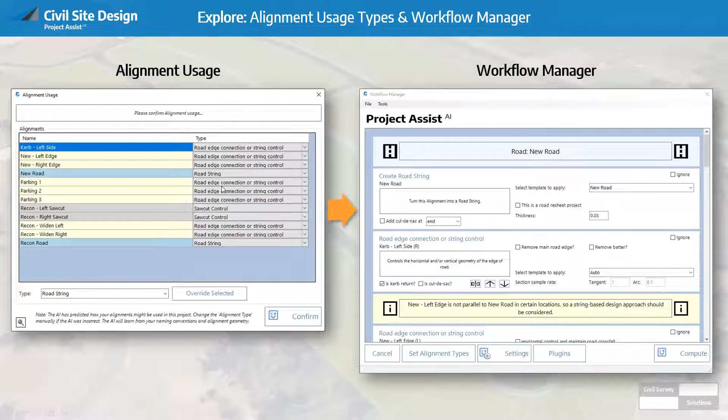Yeah, that's good. And when it comes to everything we're talking about, including working on existing or new projects, this morning we published a playlist of quite a number of videos on our YouTube channel which unpack in depth all of what we're going to be doing today. The second project I'll be working on has some road widening options and resheet options. There are 3 videos in this playlist associated to road widening on that particular project. This is a screenshot, so I can't scroll through it. So particularly with things like the alignment usage types we just saw, we can't go through all of them in one web session. So the idea is that they've all been unpacked in a little mini 6-part series for you, building up a project from scratch, which I'll make reference to at the end.

So the first project I'll be doing will actually start entirely from scratch. There'll be nothing on there other than alignments and templates. And this is the key to using Project Assist: it uses alignments and templates that you've created. So in the first instance, I'll be getting Project Assist to help me develop and build this road from literally the alignments. There'll be a center line for both of these 2 roads, and there are custom curb returns and also custom widening out to alignments on all of the roads, which we'll see in context very shortly.

Once we've done that, first of all, we'll be importing alignments to represent these islands and getting Project Assist to build them into the model for us using Model Builder, whereas we would normally do this manually. In fact, some of you may remember that a few years back I did a webinar where I actually used Model Builder on this job.

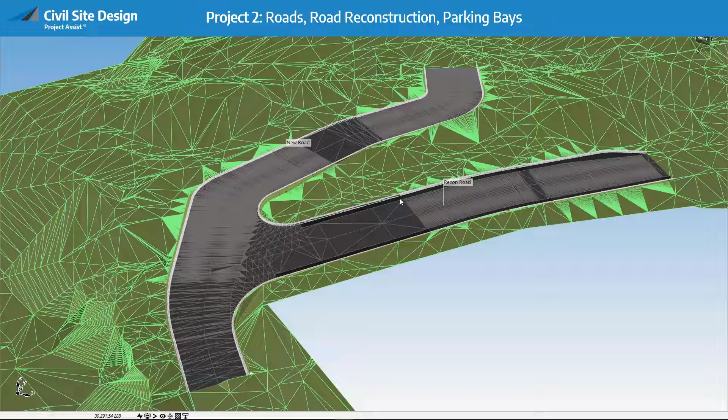Project Assist will do all of that for us, which is going to be extremely exciting to see. Secondly, we'll be then looking at a reconstruction road, building up in 3 phases, putting in a new road with some custom widening. Following that, we'll be then connecting in another road to that, which actually has some widening and some saw cuts. And then following that, we'll then get Project Assist to put in the parking bays for us. And you can see there a lot has happened in respect of trimming and maintaining elevations and connectivity, etc., all of which Project Assist will do, and we will show you.

Following that, Andrew, I'll just hand over to you. I've got these 3 slides for the rural road. Yes, so towards the end of the session, I'm going to explain the idea of plugins with Project Assist, and we've created a plugin called Australian Rural Road. I actually have a background at council, working for a regional council, so I used to do a lot of rural roads, and so in my example, I'll be showing you this plugin which will automate super elevation, sight distance, line marking, table drains, all of that type of stuff.

So it shouldn't go too long, but the idea of plugins with Project Assist is pretty exciting for us as well. Yeah. For those of you that missed it, there's an example of something you may see in Civil Site Design today, which we are using, well, at least I'm using a beta. Yeah, I'm the same. So we'll be able to show some new exciting stuff coming as well. Yeah, get a sneaky preview of some of the extra bits and pieces.

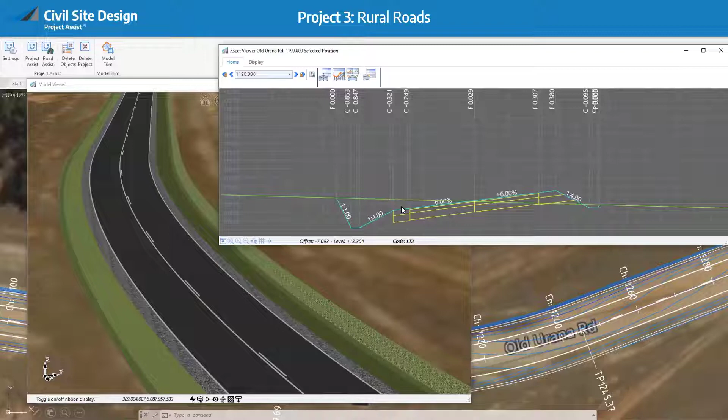Just following on from a question that we had earlier, the Autodesk platform version and BricsCAD version that this will work on, Andrew, would it be 2016? That's right. Yes. Onwards, and then BricsCAD V21. V21. Yes. Okay. So anything pre 2016, unfortunately, we won't be able to use.

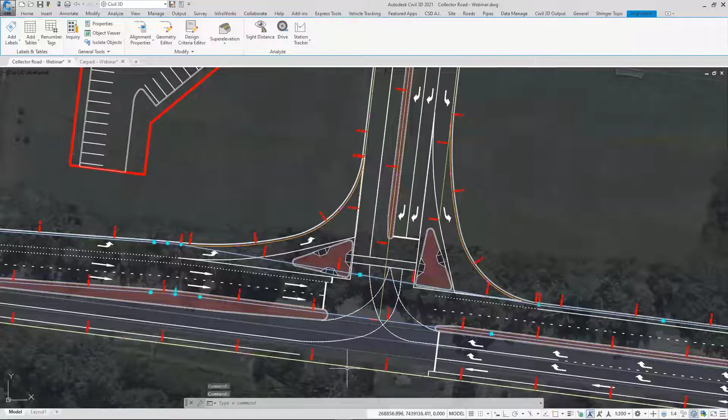Okay, all of the projects you're going to see today are real projects. This is a customer project provided to us from Queensland. So as far as setup goes, I have alignments that have been created by myself to delineate not only the crown, but also the left edges and right edges for all of the different roads. And then you can see here, we've got an alignment to delineate the outside edge. You'll notice that you can actually see the islands and the alignments for the roundabouts, but they're not going to be in play. So really all we're doing is focusing on the roads that we've got in play. I said two, I meant three, and the custom curb returns that are added in here.

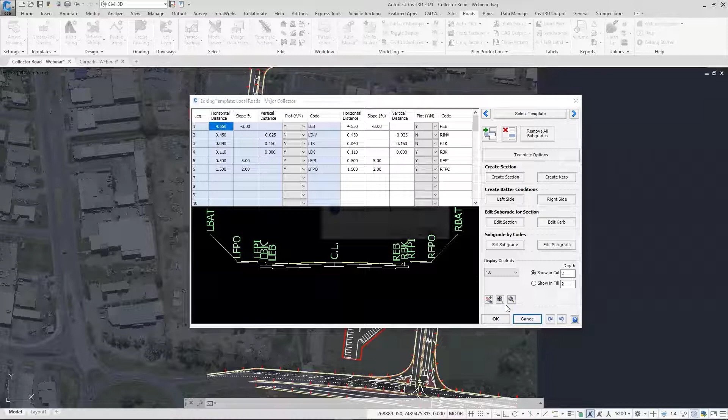So as far as the software is concerned, we haven't done anything with this job. We have drawn the alignments. We've got one template, which is this template here, that we're going to be using for the roads. The curb returns are going to be using auto, as you'll see in a second. So as far as setup goes, it's all relatively straightforward. As a manual process, I'd be looking to maybe use auto curb returns, auto road creation, then manually creating the curb returns myself, and then applying design variations to widen the EB codes onto these alignments.

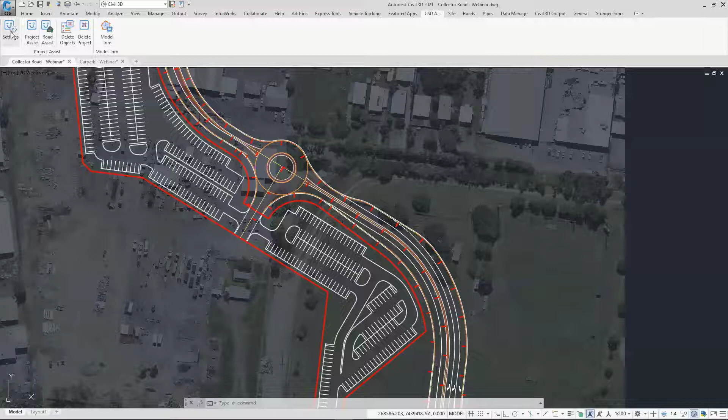I've just had a question come in about how do we access Project Assist. On V22, you'll see this ribbon tab up here. So on V22 onwards, you will see CSD AI, which conveniently is where I'm going to be going now. Before we start, I'm just going to unpack a little bit of the settings. We have a video that is dedicated to the settings on YouTube. It's an 8-minute video, but it unpacks all of this in context to how it works with Project Assist. I don't just simply talk through the form. I show you in context how it works with what you're actually going to be producing later.

But just a few things for you. First of all, what the software will do is it will look to assign these templates that you can see here to different aspects of your design. And these are from your data folder. So in a second, Project Assist will fire up and it will go, hey, you've got an urban road here. This is the template I expect that you'll probably want to put on there. Okay.

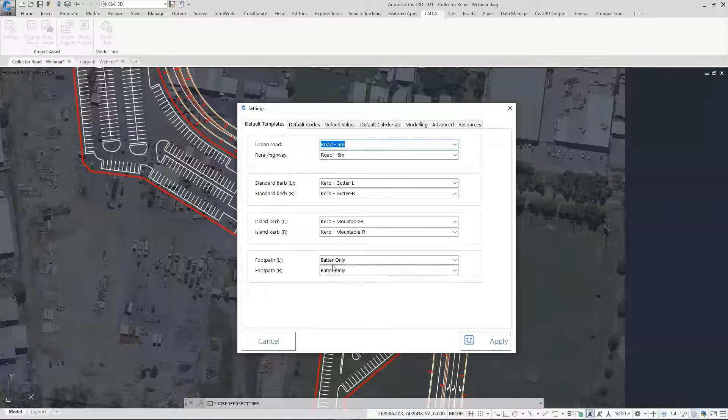Now, in my example, I'm going to change it in a minute, but I'll be using this one instead. So for each job, this is unique, but this just allows you to come in and predefine roughly the templates that you'd be looking to use. The default codes are what Project Assist will look for and then look to manage for you later on.

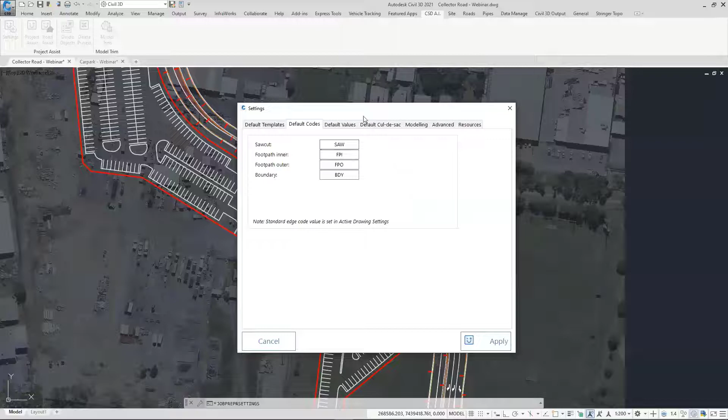So for example, I might be using a template where I've got a saw cut, and when the software sees the SAW code, the saw cut being applied, it will determine a number of different things it could do with that particular code. If you don't use saw cut, for example, on a job and you use SW, then go ahead and change that. But these are the default codes it looks for to manage within the job.

There are some other tabs in here, but due to time, I'm not going to go into too much depth with them, only because we are really very limited. And the video that we've created for this unpacks this in great detail to show you exactly what this does. Andrew, have you got any comments on that, or anything specific you might want to mention from this?

No, I reckon jump in. The only thing I'd say is that video you've got on YouTube that you posted today on the settings is brilliant. It's about 9 minutes and it covers everything in great detail. Great. Yeah, great. Thank you.

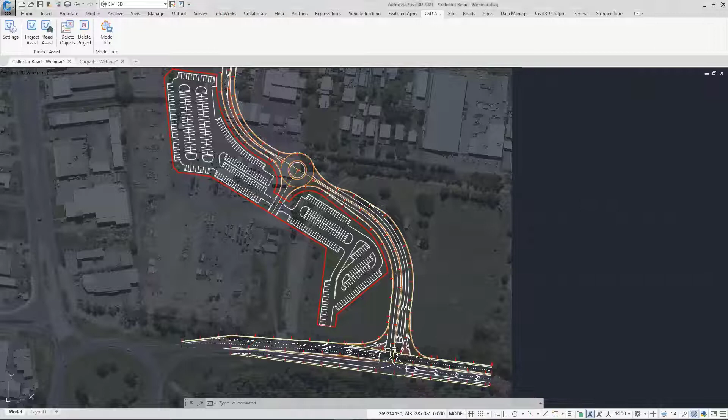Right, let's get started. So I've got alignments, I've got templates. That's literally all I've got to start with. So I'm going to go Project Assist. Now, this is called the alignment usage form. And again, there's a 6-part video series which explains what this does and then unpacks all of these different types.

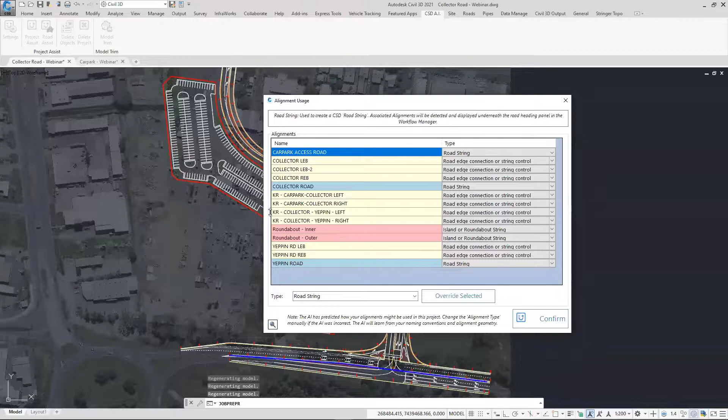Now, to make life very simple, for the start of this job we're going to focus on the 2 types for all of these alignments. We're going to ignore the roundabout for the time being, but the reason why I've left that in there will become clear in a second. So it has a look at all of your alignments in your project, and then depending on the naming convention, it determines what type should be applied. And as you just saw there, I can actually just go and pick a different type and override it.

Car park access road, which you can see is being highlighted in the drawing, collector road, which is highlighted in the drawing, and Yeppin road, yes, they're going to become road strings. The alignments that are being used to control the left edges of bitumen and right edges of bitumen on all of them are always going to be set up as road edge connection or string control. You'll find that road edge connection and string control does a multitude of different types, okay? But this is the one we're going to be picking.

So for the LEB, the REB, the highlight on this is really helpful as well, so I can actually see where the alignments are. Cul-de-sacs and curb returns are always going to be assigned as road edge connections and string controls. The only difference with the roundabout inner and outer is that we're going to assign a different type, and I'm going to cover those when I look at adding the islands later. Let's click confirm.

Now, this is basically the first time this is run. So the software's gone in and had a look at the different types that I've set up and then determined how everything should be associated. So this is what the workflow manager can do. So car park access road, this is the road over here. It's saying that it's going to turn it into a road and apply a template. All of them are going to have the same template. So as you can see here, I'm overriding that.

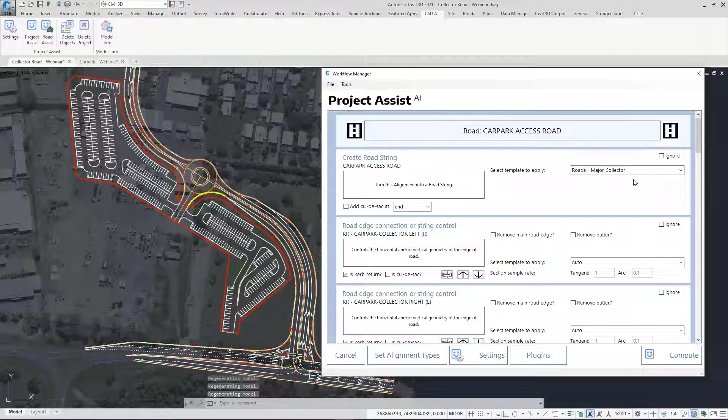Further down, we've then got the collector road itself. And obviously the template that we're picking there needs to be roads major collector. We'll be unpacking some of the discussions on thicknesses and resheets in the next job. The LEB and LEB2 alignments, which are basically following along this left side here, the software said, hey, so what would you like to do with these?

I can either take the LEB, maintain the crossfall that it is at the moment, so let's say it's -3%, and position it onto an alignment. So it's basically using the match to alignment variation. The second says, hey, what I can do for you is create a string, a profile string on top of that alignment, and you can go in and have the code positioned on that string and control the horizontal and vertical elevation of that particular code. Lastly, you can then actually have the software create a completely independent string. Okay, so it won't be attached with a variation to the design.

We're going to just simply use horizontal control and maintain road crossfall, which is pretty much match to alignment. We're going to do that for the LEB1, LEB2, and further down, you'll notice that it's saying it's creating a separate string. The reason for this, the majority of the time why it's automatically gone for create separate string, is because if the geometry of the alignment that you are using, in this case for the right edge of bitumen, varies quite considerably, the software would determine, if you're using cross-section design, that probably using a variation and positioning the code onto the alignment may not work. Okay, so it by default then goes, well, actually, I'd probably recommend a separate string.

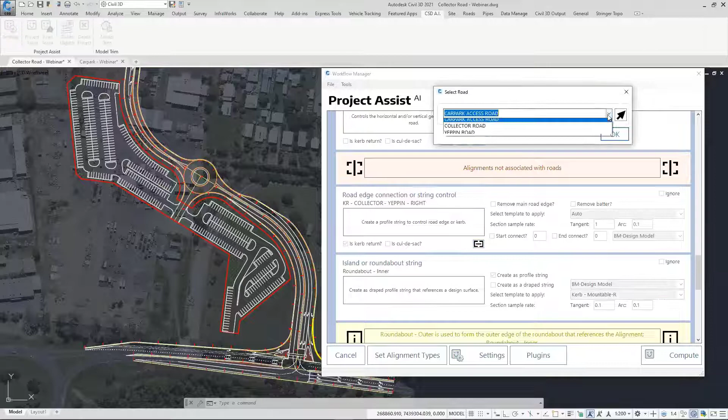The collector road curb return, as you'll notice here on the Yeppin curb return, is not associated to the road. So we need to make sure that it's associated to the collector road, always the side road. And the same goes lastly with the other alignment here, which is collector road. Now you'll notice that there is one remaining alignment in the job, which is called roundabout inner.

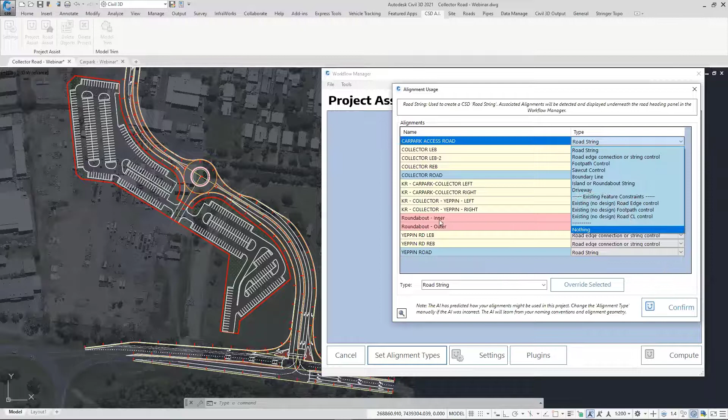In fact, what I might do is just show you now, set alignment types. When you come in here into the alignment usage types and click on the pull down, you'll see nothing. When you say nothing, what you're doing is you're teaching the AI that if it sees that alignment naming type or that alignment name, and this could be an alignment that you've created maybe to cut cross sections through your job, or maybe it's for a pipeline, so it's not really ever going to be used, you'd probably pick nothing. But if, for example, this will be used later on, I don't pick nothing because that's telling the AI never to use it again.

What I do, I'm just going to close this down, is I come in and tell it to ignore. So I'm going to ignore this, so it won't become part of this build. It's just not going to add it in at all. Okay, that means that Project Assist will try and use it the next time that we run it.

Let's now just scroll a little bit further down. If there were no curb returns or custom curb returns created, I could ask the software to apply 10-meter radius values for any that didn't have something there already. Other than that, we'll talk about the plugins later when Andrew comes to rural roads. I just simply click compute.

When you run this, have a look at the settings video, but there's an option which says, when I've done this, run it or create a thread, and it will create a thread which basically will recalculate everything for you if something changes. So we're going to click on build here. This is real time. This is not me doing anything other than just letting the software build, construct variations, curb returns, and put everything together. Whilst it's building, in fact, that's done.

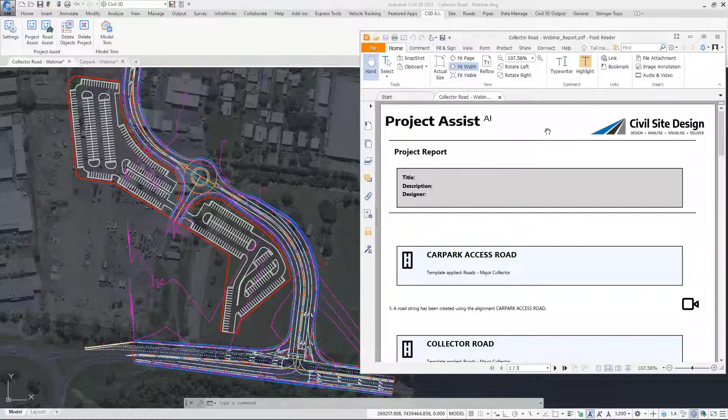Okay, so I'm just going to bring this in. When Project Assist has completed a build, it will generate for you a PDF report of every single step that it has done. So what you're seeing here is all of the work that you as a user would be doing if you were to create this yourself.

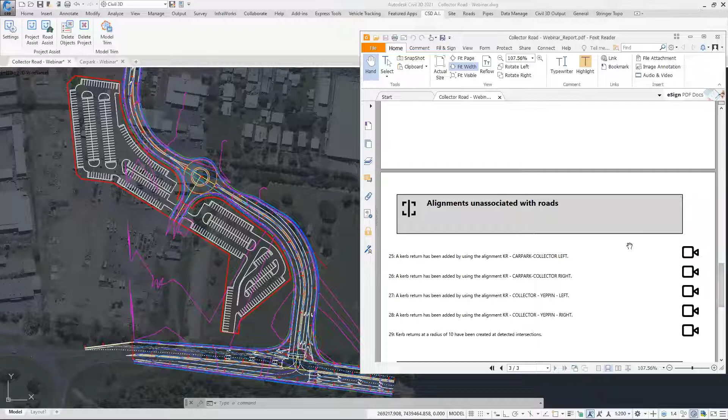One of the best things about this is it adds in extra sections for detail. So when you're creating roads initially, you're thinking, well, okay, I'll just set this to 10 meters or 15 meters. And then you have to go in afterwards and start adding extra sections, whereas this does this for you. So you can see here from the 29 steps that have just taken place in a matter of about 20 seconds, it's now built this for me.

Really, really recommend, when you run this for the first time or second time, look through what it's done. It's really important because you want to make sure that you've set it up correctly. You want to make sure that the correct variation, for example, has been applied over the correct chainage range, etc. This is building this for you, but we need to obviously make sure you always have a run through to check it. Let's just see what it's done.

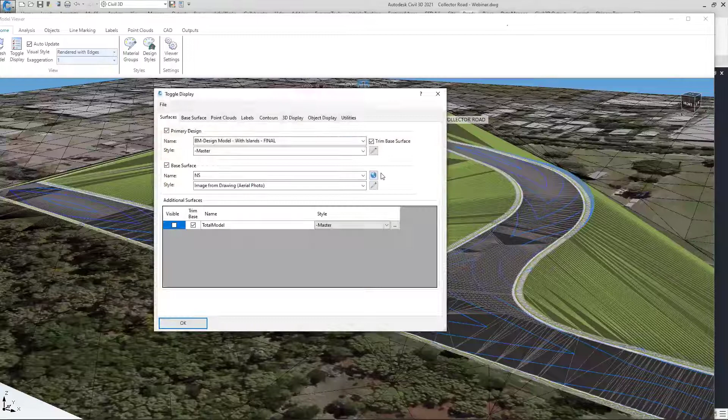What we'll do first of all is just go to the Roads tab, Model Viewer. Time is racing away, so I'm going to have to get through this quickly. Just bring Model View over to one side. And we'll go, I'm not sure why the built model got created, but anyway, that's something inherent from this job. We're just going to go okay.

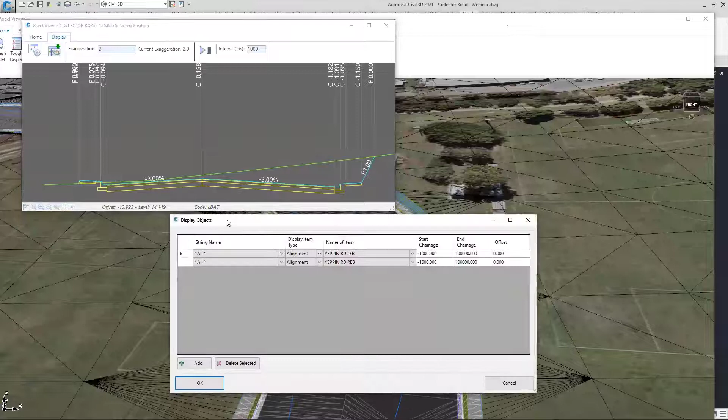So if we'd started this job from scratch correctly, you would be seeing this. Okay, so this is what Project Assist has just built for us. Got the roads, got the intersections, got the widening. If I right click, display a cross section, we can see here by going to the display tab, and let's just pop in some alignments for Yeppin LEB and Yeppin REB. You can see it's matched up the codes onto those alignments.

And if we go open section data, it's taken the LEB, matched it onto the alignment, and taken the REB, matched it onto the alignment. And it's done that for all of them. So as far as just quickly generating content goes and building your road from scratch, that's obviously the first part. The second part is, well, what if I want to add islands?

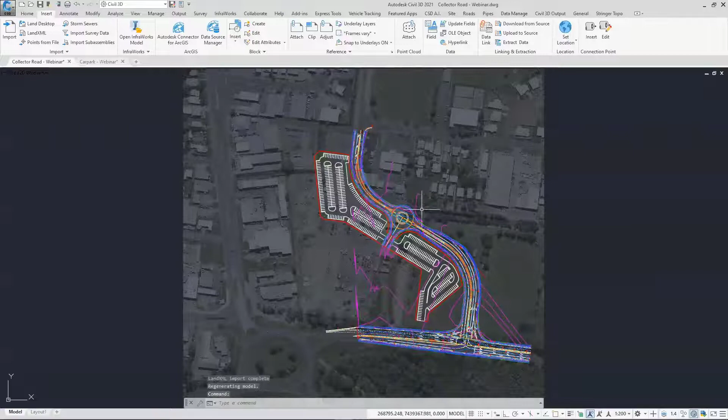Okay, now the islands are quite extensive, as you can see here. Well, in fact, what we'll do is, first of all, we'll bring them in as an XML. So rather than having them in the job initially, what I've done is created them as an XML file. And the reason for that, when we looked at the alignment usage form, it would have been quite overwhelming for you guys to see a lot more alignments. So we've basically done this in two parts to kind of reduce the impact.

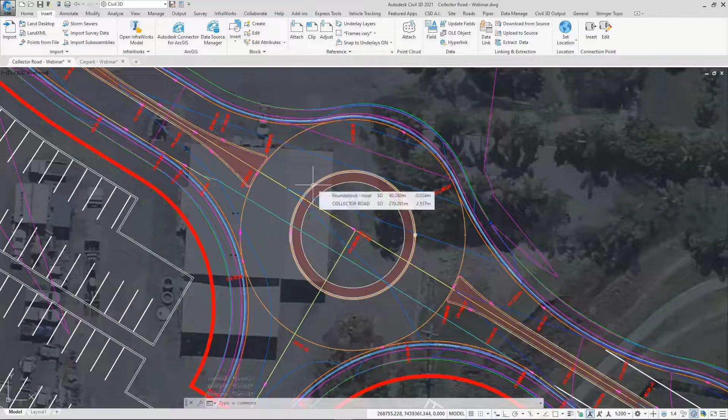So we've got alignments here for our islands. As you can see here, we've got 6 of them down here. And we've also got, which I'd already had in the job, which is a great way of being able to show you how ignore works, a couple of alignments for the roundabout. So the intention is that these islands will simply become draped profile strings draped onto a surface, and then the roundabout will also need to be draped.

Now, let's run it, but there's going to be a small caveat with this. Just saying simply drape onto total model won't work. So what we're going to do is we're going to go Project Assist. You can see the roundabout, outer and inner are still there. They're all being chosen as island and roundabout strings. Okay, the software will know if it's a roundabout as opposed to an island, but they're all getting the same tag. We're going to click on confirm.

Even, and this is my bit with this, even if you use Project Assist just to do islands on projects, it's still a huge time saver as opposed to doing this all via Model Builder. Now, they're not associated to roads, okay, because they're going to be draped onto a surface.

When you create a draped profile string, you always determine that there's a surface that it's connected to. So the surface that it will be connected to is this one here, BM design model. Now, the software is going to go ahead and use Model Builder and create a model which combines all of the strings that are already in the job, including Total Model. It's then going to take that model and allow us to drape straight onto it.

Once it has draped the islands onto that surface, we've obviously got a model with islands placed on top of it. Well, if I want to see all of that combined, the software will actually go ahead, and this is where I'm just going to flick ahead here down to the bottom. It will create another model which combines the design with the design of the islands. You'll see this happen in a second.

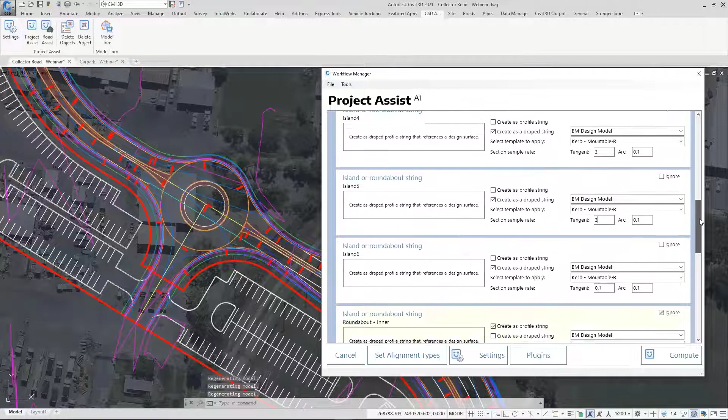So you can see it's applied a template. Again, we could go in and override the template. It's even determined the direction, which we'll mention in a second. And we'll come further down, and then we'll say, hey, don't ignore the roundabout. You'll notice the outer is not there. And again, this is because the outer is being used to form the edge. So we don't need to add it to the calculation. The software is going to do this for us.

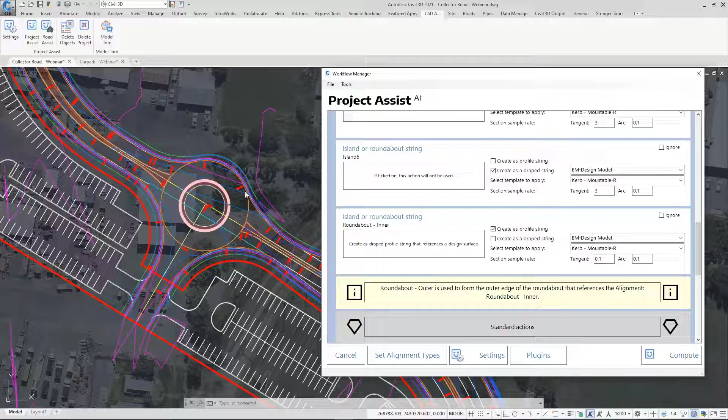Now, this will take a little bit longer. As Andrew's already pointed out, the sampling can be increased. To be honest with you, when I've run this with the sampling being around 0.1, it takes about a minute. And you may be thinking, well, a minute to create that many drape strings, maybe you are thinking that's incredibly quick.

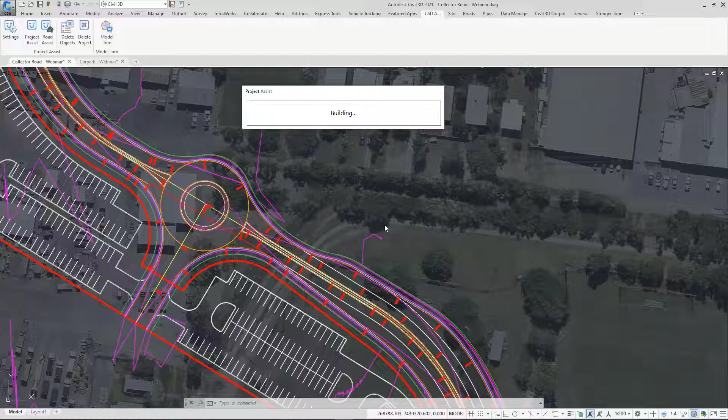What it's also doing here, whilst it's draping the strings all onto that surface and creating them, adding the template, is it's also using Model Builder to cut all of the centerline and dumb codes out of the model where they overlap on top of these particular strings. So in a minute, what you're going to see is the centerline no longer within this particular model being created or drawn underneath these islands. So this is the part where using Project Assist and Model Builder comes into its own. So that's perfectly timed.

And as you can see here, we've ended up with approximately 51 steps being taken. So I might just close that down. Let's have a look at what's happened here with the model. I'm actually going to jump straight into Model Viewer. This gives us the best context, particularly when it comes to looking at drape strings, to see what's happened.

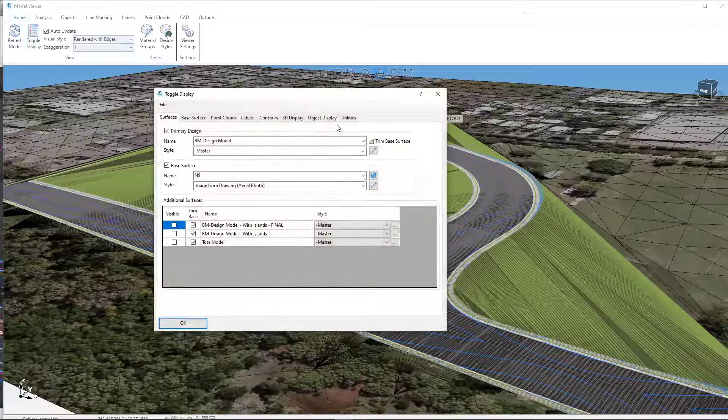So here's Total Model. We'll go Toggle Display, and we'll ask it to simply just show the built model here, BM design model. So the software went ahead, created a built model, and just said, hey, include Total Model. That's all it's done. Then, once it's done that, it's then used that to drape on the islands, which is this model here. I'm going to click OK. And this is the work that it's done.

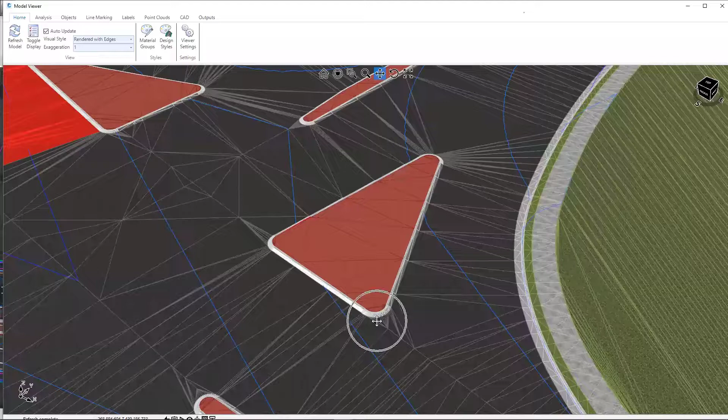So for a start, I think this is one of the nasty little islands that I've had to use Model Builder. Project Assist has used Model Builder to trim the dumb codes from the curb return and the edge codes from the road to complete that all the way through. And we'll come back to what's going on here in a second, including the roundabout. Okay, so the roundabout has been draped around the edge onto that particular surface.

And then if we right click over here and open the vertical grading, the inner string has been created. So the inner string, this isn't a template that's coming across here. This is pure modeling that we're seeing here. The inner string, which is called inner here, if we look at auto profile, all of these constraint values have come from the settings, by the way. So have a look at the settings video.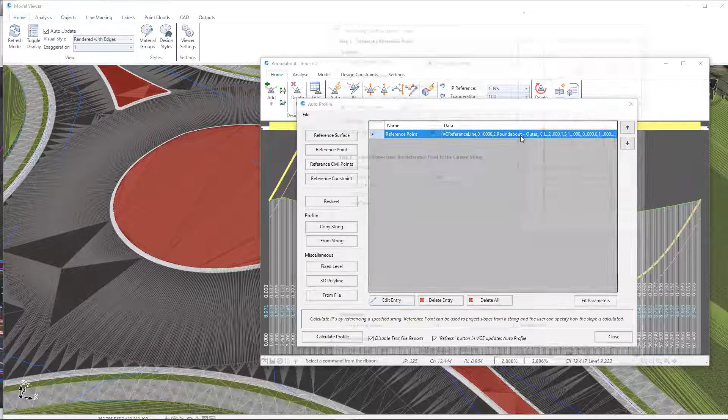Auto profile, I'm going to double click, and you can see here the roundabout outer, using this reference point entry. I made a big song and dance about using reference point in the string techniques webinar a few weeks back, so have a look at that to unpack reference point in a bit more detail. But you can see here the elevations of the inner are being set 3% above the center line of the outer, which is this here. So if I wanted to change that, I could go in and change those values.

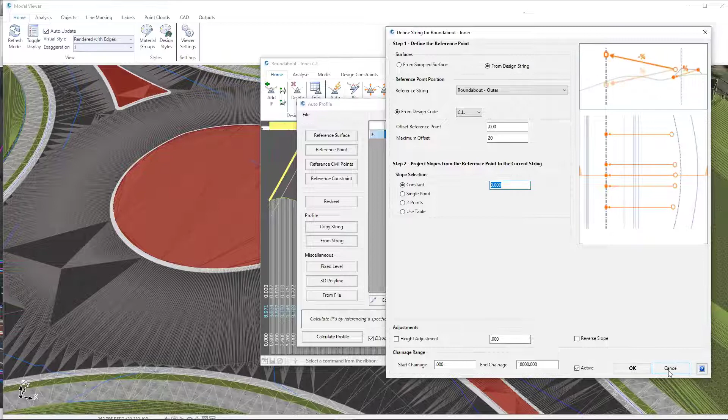So we're building you a project which you can now go in and start to work with and manage. The hard work of Model Builder has just been done for you. So the center line of these two roads across this intersection have been cut out. And as you can see here, we've got this really nice smooth transition into the roundabout.

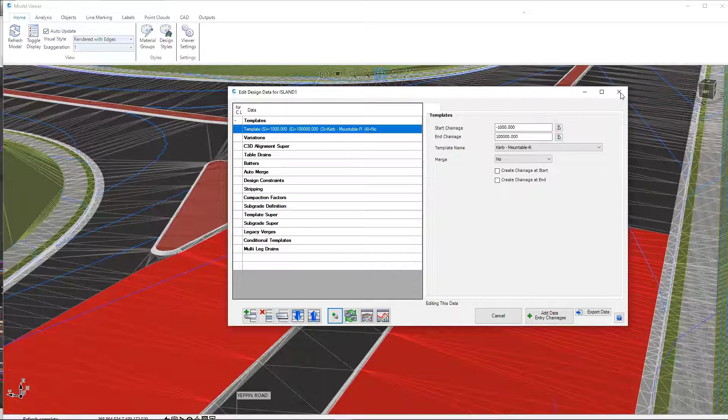One thing that you may not get perfect every single time is, you can see here, the template that was applied was actually the wrong way around. So instead of Kerb Mountable-L, that should have been right. So we're just going to go templates, change that, Kerb Mountable-R, not the other way around, auto model, and we're just going to close this down once it's finished. So that auto model is now updating all of the models in the background.

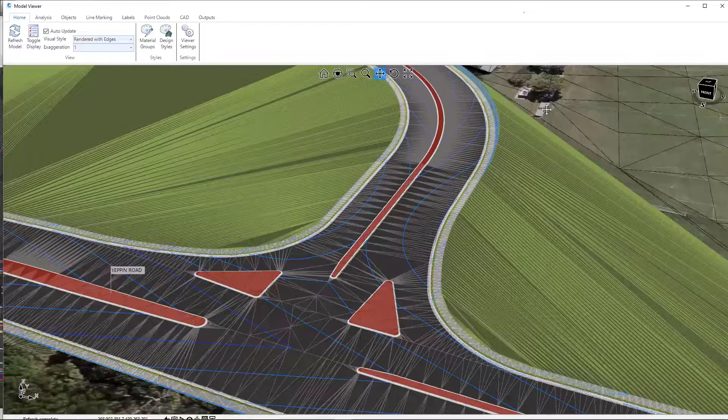So that's the first example. Took a little bit longer than I intended, but we've unpacked a little bit more on this. So you can see how in a matter of minutes, I'm able to build this and start designing. Okay, so the hard work has been done for me with Model Builder. I can start to work with this, knowing that in the background, I've also got threads.

If I go thread editor, islands, here we go. So I've got roads only. This is an entire thread to update my design if something changes. And I've got another one here called islands. So I can just compute the thread to rerun it if something changes, which is extremely handy. So that's the first job we wanted to cover.

Andrew, have we got any questions just while I'm flicking over to the next project? Okay, let me just jump in. We had one: can you manually change the string for the crossfall if there are constraints? So yes, you can. What Project Assist is doing is creating the strings for you. It's setting up the design constraints, and it's setting up auto profile entries like the reference point that

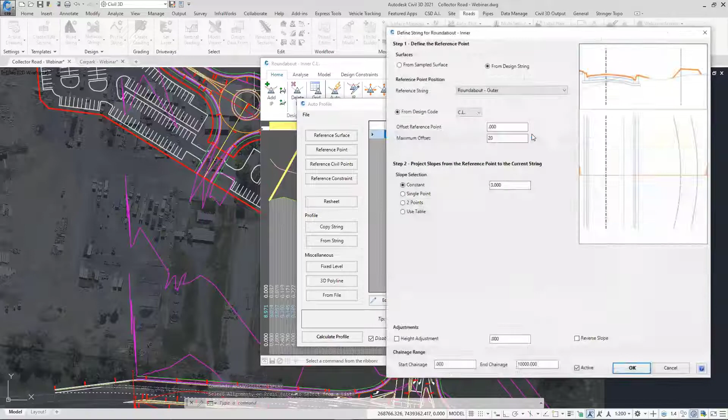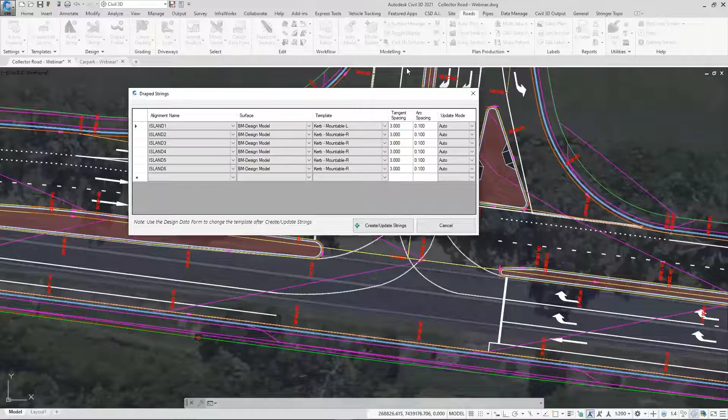Jonathan showed. The beauty is everything that's done could have been done manually by you. This is a great thing about this type of automation. There's no black box stuff. So if you want to delete entries, override stuff, change stuff, you can. Traditional automation can be a bit constraining. A good example is the curb return command, where you have to follow certain rules and parameters in order to get it to work. But this is building the project up the same way a user would.

Yeah, and in fact, that reminds me about the next part of this: if you want to remove something from the model, again, the way the user would. I'm just going to take out one of the islands. Now, normally you'd probably go up to the roads tab and go delete string, and by doing so, you then leave an entry in Model Builder for that string. There could be other consequences because you've then got to tidy up and remove other bits and pieces from your

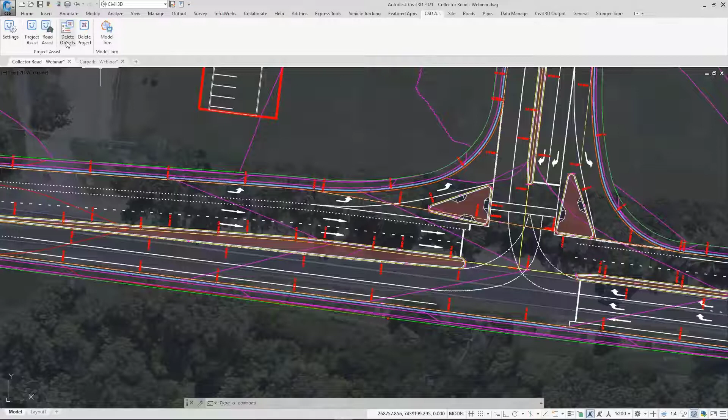design. Civil Site Design in the AI tab now has a delete objects option, which, to be fair, you can use just as an independent delete option. And the great thing about this is it does everything. It removes all of the variations, references, Model Builder entries along with that string. So if I go to island 1 here and just remove references, the impact of doing that would be fairly significant.

Okay, I've got to remove a drape string entry, etc. Let's just go delete selected. Yes, and it may take it a few seconds to wipe it out. But the idea is that this tool, and there are other tabs in here you can actually use to delete, is a great way of removing content, but also removing content when it's been added to models, which is one of the big things.

So you can see there, we'll actually get a notification in a second saying it's complete, which it's done, and click close, and that model has now been updated without the island included.

Following on from that, I just wanted to show you one other tool which was next to delete objects, which was delete project. So this is a project that we've sort of semi-started. I've decided, you know what, I want to start from scratch, delete project. Yes, this won't delete your alignments. This will only delete your strings and models. Go, and now I've started from scratch. So the intention was just to show you how those two tools work.

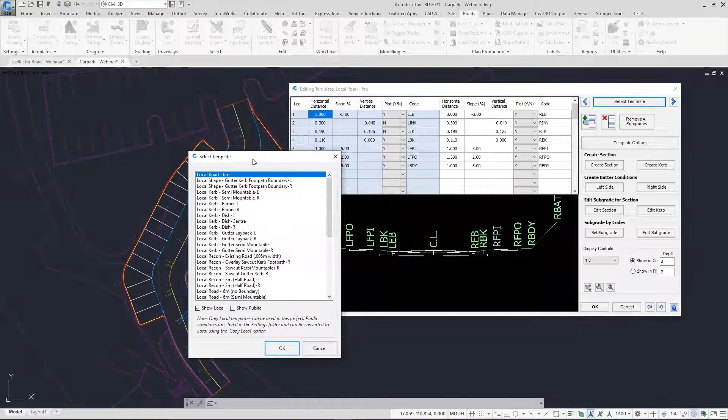So again, this job has had a little bit of work done to it. We've got alignments for the left edges and right edges of both roads. We've actually got one for a saw cut here on this particular road. And then we've also got alignments to delineate the parking bays. We've got a couple of templates, and they are as follows. There's quite a few in this particular job, as you can see.

We've got new road, which is the road going in here, a straightforward road with a one-way crossfall. And then in addition, we have reconstruction road, which is slightly different, but it's got some saw cuts positioned in it, which will be quite an interesting one to show you for this road. So what we're going to do first of all is build new road on its own and have the left edge and the right edges managed with those alignments. So very, very similar to the job we just did.

I'm going to go project assist. You can see here that all the alignments are offered to us, including the parking bays. Okay, so we're going to ignore the parking bays. We're going to ignore everything that's got recon in it. We're going to look at new road. New road will become a road string. I'm going to be managing the left edge and right edge of that road. So these two alignments will become road edge connection or string control. We're going to set nothing for the remainder. As I said earlier, we're going to use ignore to ignore those.

So new road, we're going to be using the new road template. We scroll down, we can find that here. And further down, we can then tell it what to do with the left edge and the right edge. And again, due to the fact that the geometry on this left edge and right edge is quite varying from the center line, we're going to override the fact that the software is warning us that the string-based design approach could be better. We're going to say horizontal control.

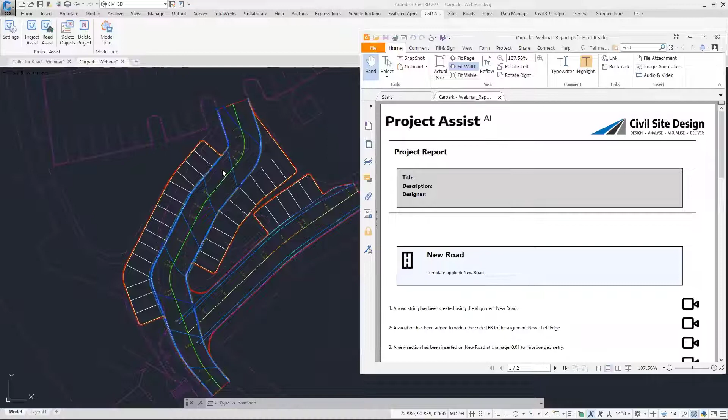So that takes a matter of seconds, as you can see there. Road 1, a lot of extra samples have been added in because we've got this varying geometry. Just having a simple 10-meter sample rate isn't going to really cut it. So the software's gone and added in a lot of extra sampling for us. As you can see there, it's undertaken those 11 steps.

Then we decide, well, actually, I'm now going to build this recon road and connect it in with some curb returns, one of which I thought I had an alignment for, but obviously don't. So we're going to go project assist. Again, we're not going to be clicking on ignore. The one thing we are going to focus on is just what's happening with recon. Sorry, I said we're not going to click on ignore. I mean, choose nothing from the list.

Recon, left saw cut and right saw cut, are going to be flagged as saw cut control, and we'll see why in a second. Okay, and this goes back to using the SAW code within my template. The left edge and right edge, or edges of bitumen, are again going to be road edge connection or string control. Let's click confirm.

So we're going to ignore all the parking and we're going to come down to, just uncheck these boxes here. In fact, let's uncheck recon road, because recon road is the master; ignoring that ignores everything that it associates with it. We're going to choose recon road or reconstruction road from the list for our road.

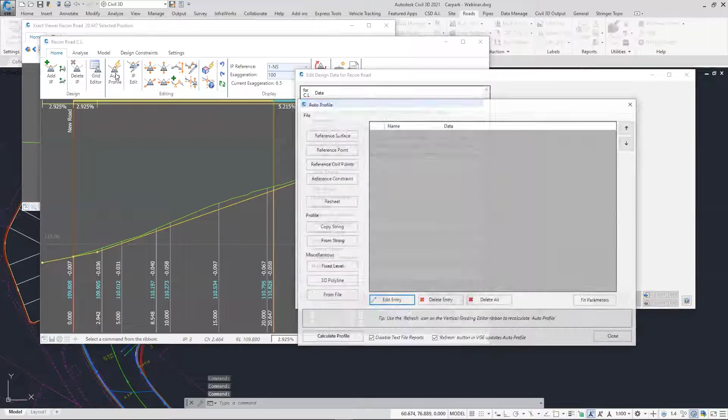What we're going to do is open up a cross section to have a look at Recon Road. And then we're going to open up the design data form, and in addition, just quickly show you the VGE. Don't think we've got auto profile. No, we don't. So as far as elevations go for the center line, the software has just done what it normally does when it creates a road string. It's just interpolated the surface and popped on a few IPs for us, which we can manage if we want.

What's happened with the saw cut is that the saw cut has been positioned, maintaining that slope of 2%, onto the alignment on the left side and on the right side, hence set code to alignment. So it's maintaining 2%. The LEB and REB are then being told to be positioned onto a string that it's created. So there's now a profile string setting the elevations of the left edge of bitumen and the right edge of bitumen. Let's have a quick look at one of those strings.

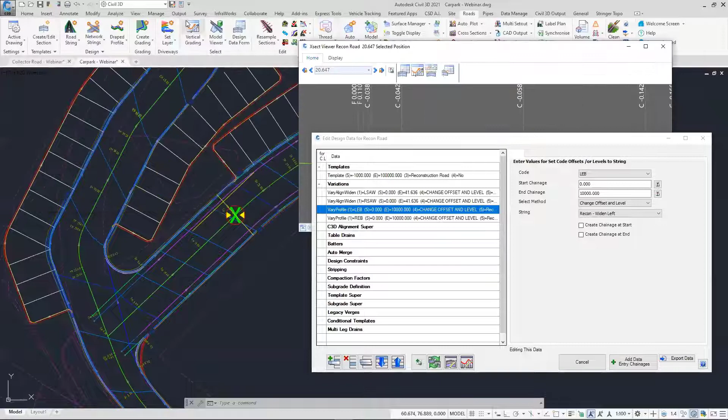So I'm just going to click here. So in similar fashion to what's happened with the roundabout on the previous job, we have an auto profile entry being created. And in there, we have a reference point entry. And in there, we have the following. And again, this is editable. So if you decide the slope isn't right or you need to change it, then this is entirely editable.

From the Recon Road centerline, I'd like to set the left edge of bitumen to be 2% from the centerline. So the left edge of bitumen and right edge of bitumen are both being controlled with a profile string that is elevated 2% below or above the centerline. So again, you can start to go in and manage these elevations.

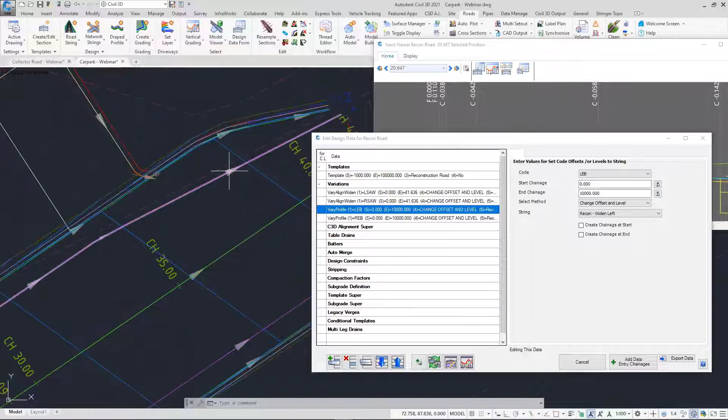You could decide, well, actually, I want to go and tweak or change some of what it's done. You'll notice that it's managed to maintain all of that, even where we've got some widening between the saw cut and the left edge of bitumen, which is extremely handy. So have a look at the three-part set of videos that we've done for that, because we unpack 3 different options, and it's a great way of seeing how you can use those 3 different options for this particular

road. The last thing we're going to do is add the islands. Sorry, the parking. So this is a really interesting one. Many times I've seen people use design variations and push the parking or the curb out with a design variation onto this alignment, which doesn't work at all when you get to here, and particularly when you look at this particular bay, really doesn't work. So let's see how Project Assist handles it.

We're going to go back to the CSD A.I. ribbon, Project Assist. We've got our remaining alignments. Now, if you are connecting or using elevations of a road, which these parking bays will need to tie back in, we make sure that they are called road edge connection or string control. So as far as this webinar is concerned, all we've done is unpacked 1, 2, 3, 4 of the alignment usage types, because the majority of what you do will probably incorporate just those 4, okay?

As I said, the video series that we've done unpacks all of these in context. So even on the car park video, which I think is part 4, the car park, which connects to a road, is this road edge connection or string control. We're going to click confirm. Now, we checked ignore earlier. The important thing to do is, if these are not roads, we have to do something similar to what we did with the curb return. Make sure that they are associated to the road they're connecting to.

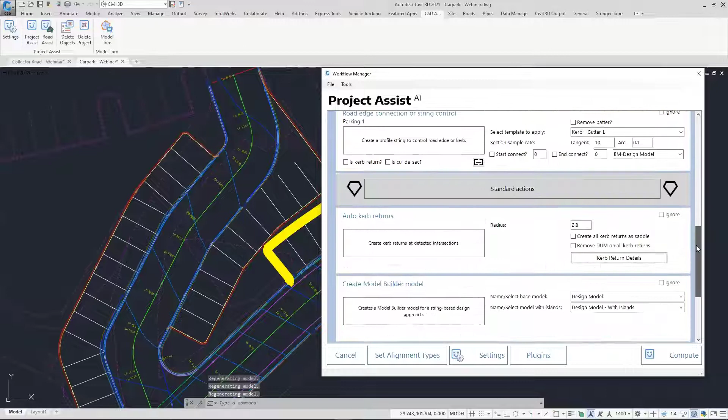So if these parking bays were just sitting somewhere further down the list, not associated to roads, we need to make sure that they're associated, as I've just done. I've associated that parking bay. Make sure it's associated to new road, meaning that it'll try and connect in the elevations. Click OK. So we've got parking 2. And what we're going to do is say, yes, I want this to be a separate string.

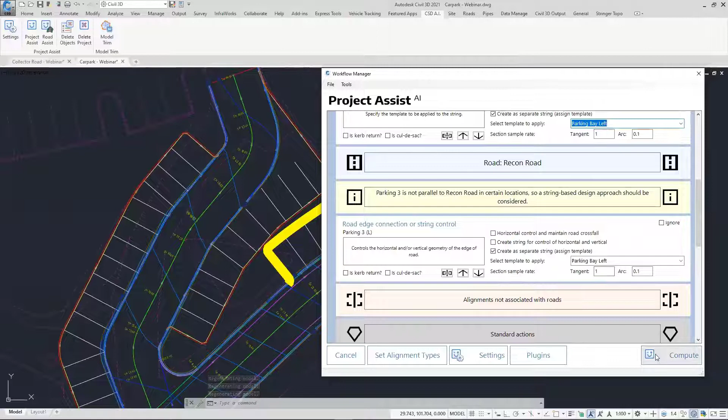I'm not going to be using design variations to form this. I'm going to use a separate string, and I'm going to go parking bay right. This is just a mountable curb. On the left side, I'm going to use parking bay left. And further down, you can see I've got parking bay left here. The sample rate is up to you. Let's click on compute. Oh, by the way, before I do that, you can see parking bay 3 is correctly associated to Recon Road, which is what it's connected to.

We'll just call this parking and click OK. You don't have to have the thread being named for you, but that's just something I've got set up in the settings. So we'll just let that build. As you can see here, the strings are being drawn. You can see the line work for those strings going in on all sides. And once that's finished, we'll have a look at what it's done, because Model Builder has been employed here. So again, 29 steps have been taken to build this for us.

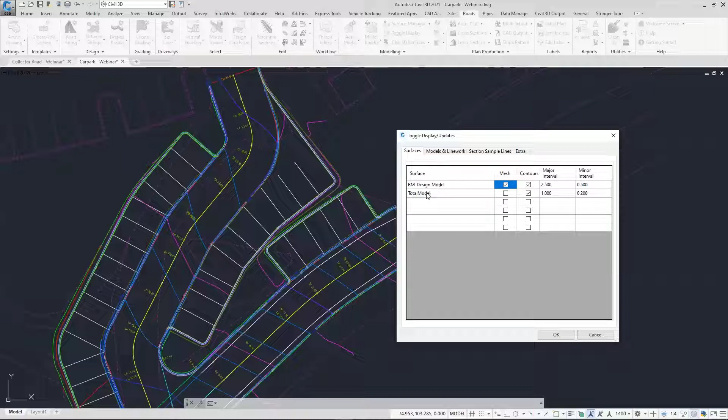Let's have a look at this. What we'll do is turn on the mesh. Notice there's no islands. And the reason for that is because we're not draping onto another surface. We're simply connecting the roads to the parking bays. And the only way you can do that is with Model Builder, and it will create this surface for you. Actually, no, we won't go with the mesh. We'll look at it in Model Viewer. It just gives better context.

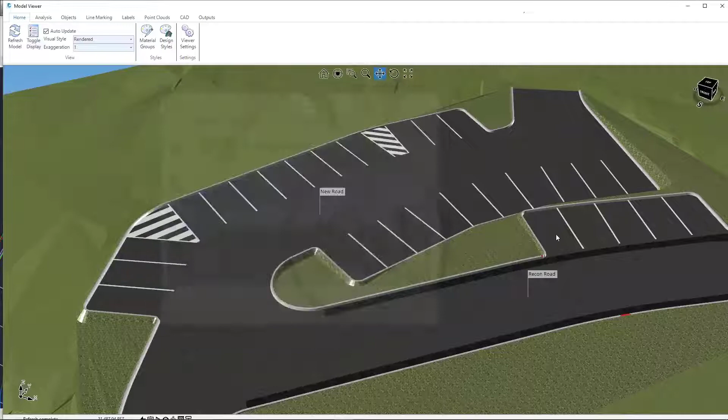Now, I've left all of this on from a previous attempt, which is my own fault, but that's okay. I thought we'll leave it. It's great to just show you really what it's done. So it's used Model Builder on both of these roads to cut out the road that was being built all the way through. And by doing so, it's then placed the parking bays in and replaced it and then built it together.

And again, have a look at the independent string control techniques webinar I did a couple of weeks ago, where I actually put in a parking bay, and then we use Project Assist to actually do this. So the way that the software has calculated the elevations, first of all, of this particular parking bay, if I right click and go vertical grading editor, and go, this is the parking bay vertical design.

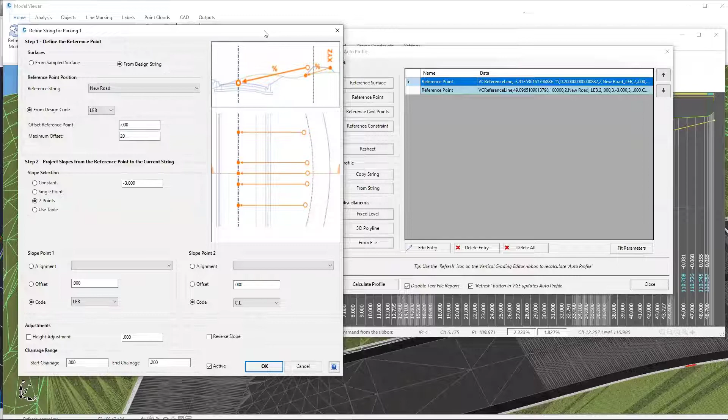If I go auto profile, it's added a couple of reference point entries for me. And the way it's calculated the start design down here and the end of the design up here is it's used reference point to calculate the slope between the center line and the left edge of bitumen, and then use that elevation and assign it for the start and the end. Okay, so have a look, as I said, at the string control techniques webinar to get more details on that. It's done that with all of them.

Okay, and I think since we originally looked at this particular job, string code Surface Extend is a tool where you could also come in and start to use that to set the elevations of the parking bays. In addition, we've added the line marking here, which I was going to do, but the fact that it's already in there is fine. We've basically used a couple of layers of line marking that have been drawn in the drawing. We're going to go marking setup here by polyline, and we've just used some of the default types to set up some of the line marking that's in here.

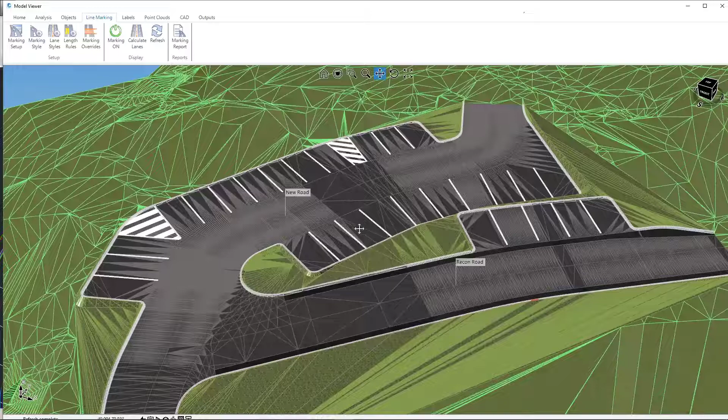So look, the intention of this particular project was, yes, it's a whistle-stop tour of what the software is doing. I might just as a final thing here, just show you how Model Builder has dealt with the road. I'm going to go up to here and we'll go to Edit, and we go Recon Road. You can see here there's an entry called PA. Okay, PA means Project Assist. It's an editable entry, unlike the total model entries.

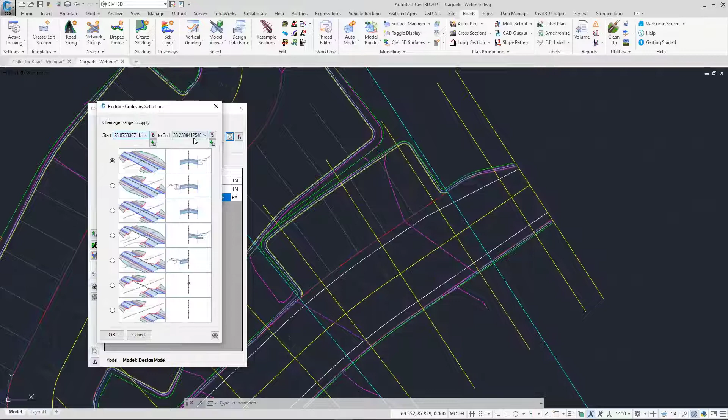I right click and go Edit. You can see here that the software has calculated the start chainage and the end chainage, and then said remove everything past the LEB code and cut that out for us, and then built it together with the model.

Now, I've whittled through that, Andrew. I'm very, very close to end of time. I apologize. Would you like to present your rural road part of the presentation? I don't think mine will take too long. So let's jump into it. No problem.

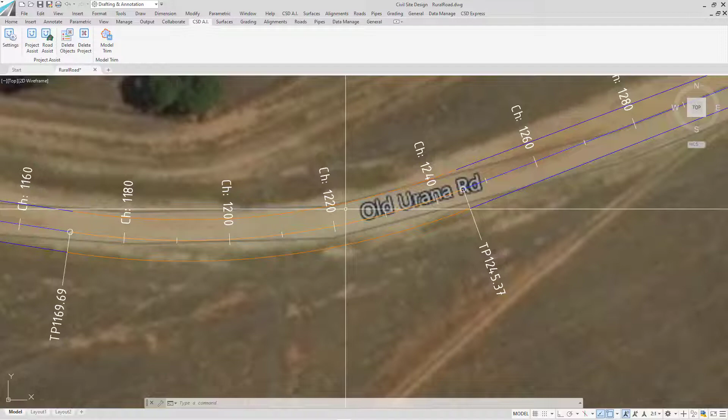So in this project, I have a number of alignments. I have an alignment that represents the center line of the road. I have some alignments controlling the road edge, which widens around the curve. We have some side roads connecting in, and then an intersection where I've got an alignment representing the existing edge of this highway, and then some alignments that control the curb return geometry.

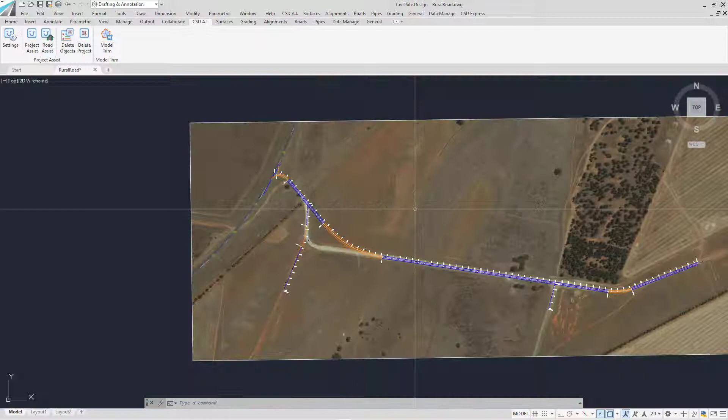So by running Project Assist from the ribbon, the software will review the alignments and assign an alignment type, which we can change and train the AI if it was incorrect. So we can see the main road alignment is a road string. We have an alignment for the existing road edge, which has been detected, and then the alignments that control the widening and the kerb returns have been set as road edge connection or string control.

So once we're happy with that, we just click on confirm, and the workflow manager will appear. So the AI has created this for us, and the idea is that we scroll through and tell the AI how we would like to set up and create this project. So firstly, we have the road string being created. The software has detected that this alignment looks like a rural road, so it's applied a rural template for us.

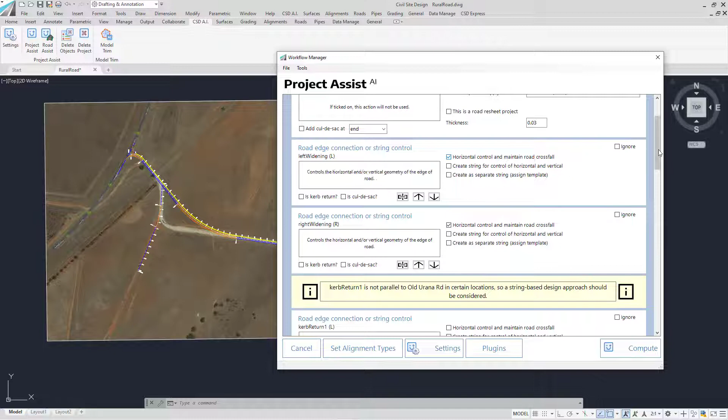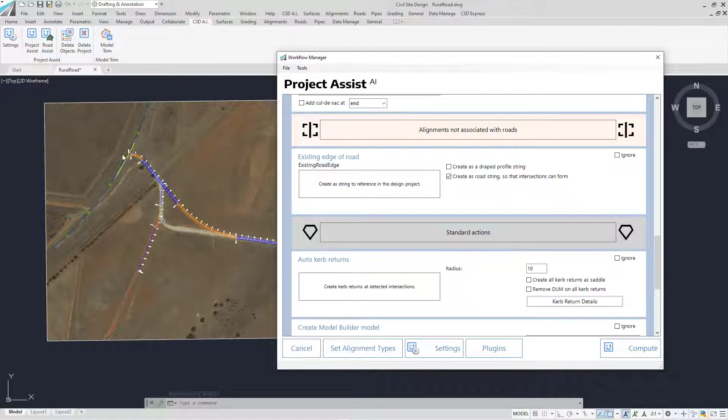The widening is set up by adding a variation to widen the EB code on the template to this alignment, which we could change if we wanted, but I'm happy with that type. Then we have some kerb returns at the intersection. I'm going to tell the software that these are kerb returns. Okay, and then we've got the side roads. I'm just going to apply a rural template for those as well. For the existing edge, it'll be created as a mini road running along the alignment, and that's so the intersections can form, so those kerb returns can form.

So I'm going to introduce you to this plugin called Australian Rural Road Design. So all we do is we click on plugins. When you install Project Assist, it comes with 2 plugins. The other one is Model Trim, which we'll make a video on at some point. So I just select Australian Rural Road and click on Add Action. So it adds this action to our workflow manager.

So what we do here is we pick the road that we want to calculate. So Old Urana Road. I pick the design speed. I'm going to go for, say, 80 km per hour design speed. We then set the maximum super elevation that we would apply, and then we tell the software what we want to calculate. And I'm just going to leave all of that ticked on.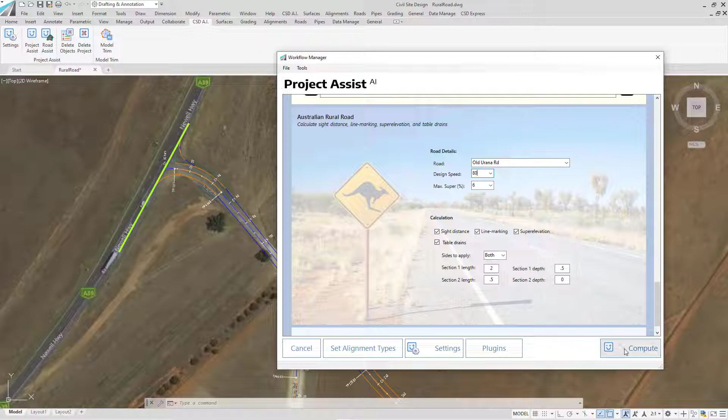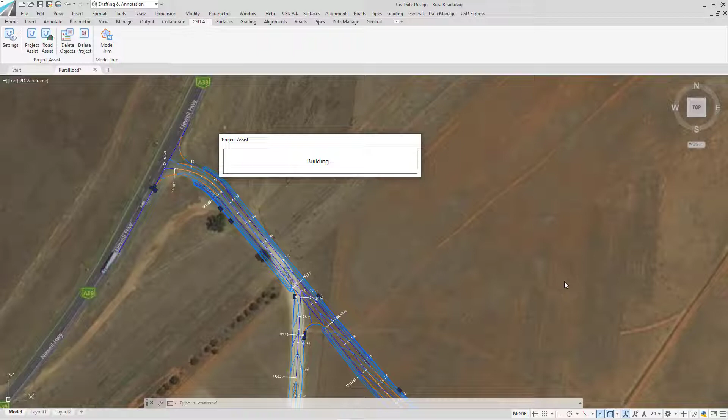So the next step is to click on Compute, and Project Assist will run through and build up the project for us. When it's completed, it'll actually load up Model Viewer because that's where some of the sight distance and line marking calculations occur.

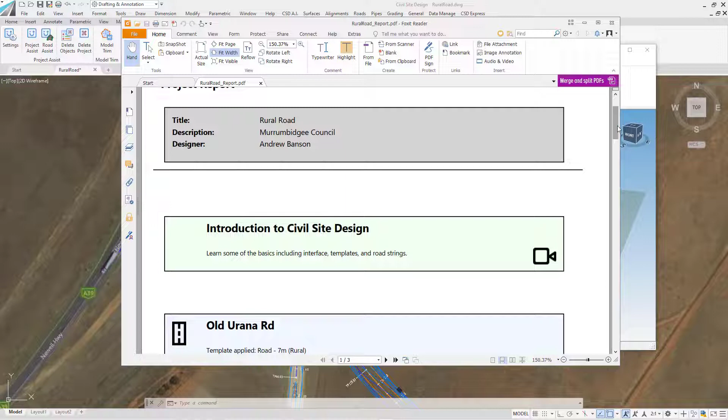If you didn't know, when you run Project Assist, you will get this PDF report outputted. The great thing about this is it tells you exactly what it has done. And Project Assist will build the project up exactly the same way that a user would. So you can see each step that is followed.

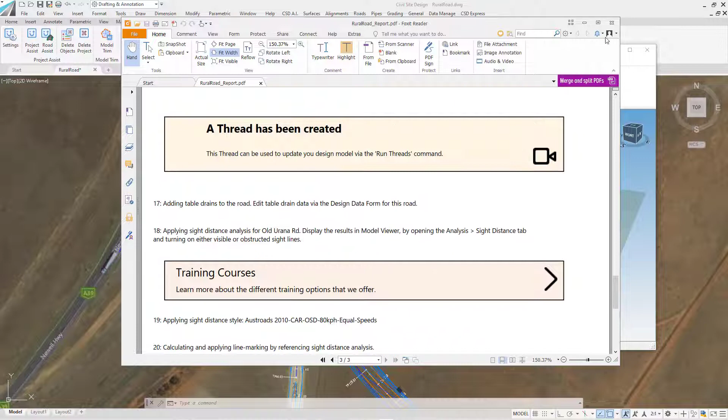If you want more information about one of these steps it's taken, you can click on this link here and watch a video. So if you didn't know how to, for example, add a variation to an alignment, click on this video and it will show you. If I get to the end of this report, we'll actually see some of the design styles that it's applied to calculate sight distance, etc. So I'm just going to close that down.

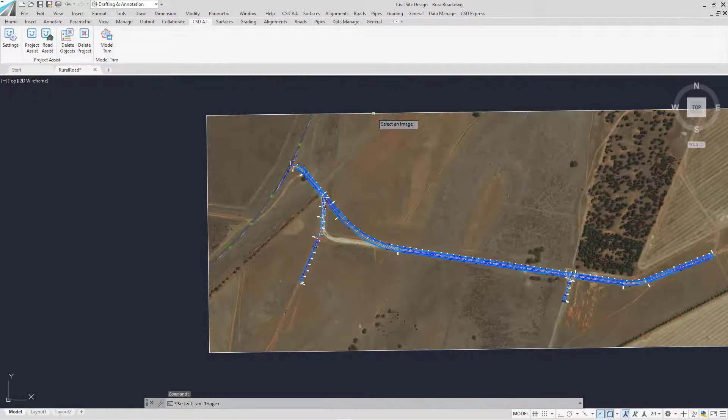The next thing I'll do is I'll very quickly apply the aerial imagery to the base surface. I'm going to go image from drawing, just select that aerial image. And then I'll just run through and show you some of the things that the software's calculated for us. Okay, so firstly you can see the line marking has been calculated.

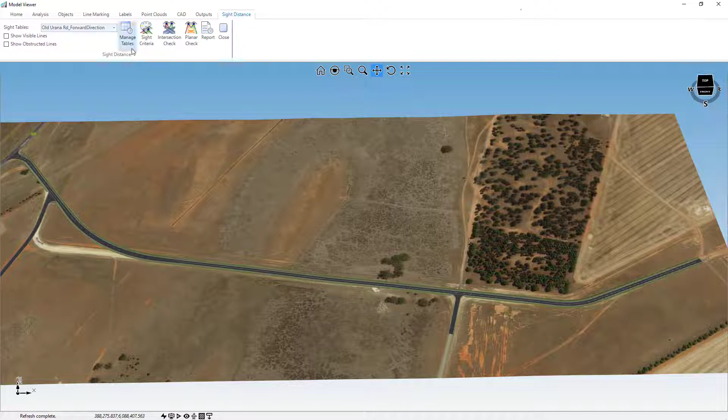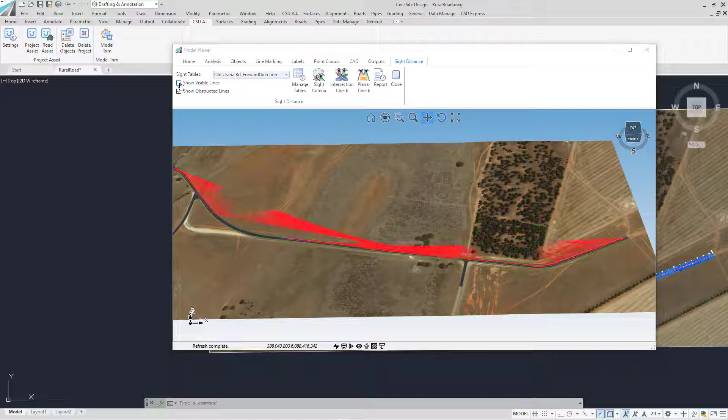The line marking has been calculated using the sight distance. So if I was to go to the Analysis tab in Model Viewer and click on Sight Distance, you'll see that some sight tables were created by Project Assist. We can review those by clicking on Manage Tables. So we've got one for the forward direction, one for the reverse direction. This is fully editable by the user. And we could display the results for those sight distance checks simply by ticking on the check boxes here.

Right, but it's those sight tables that are being used to calculate the line marking. If you want to review that, you click on the line marking tab, click on marking setup, and you'll see the different lane lines that have been added. So line marking calculated at the center line, and we have 2 entries to create the left edge and right edge line marking.

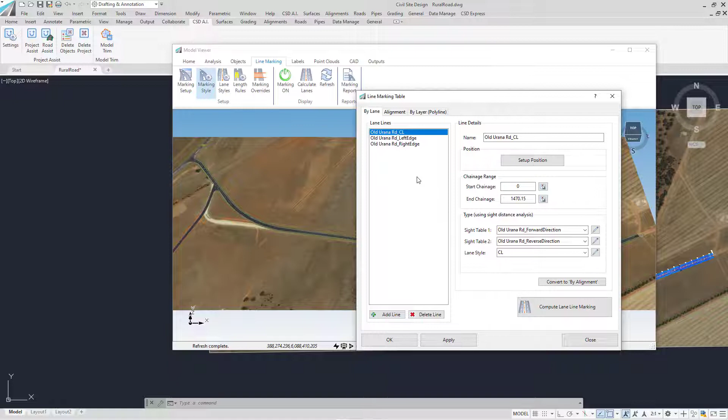If you wanted complete control over the line marking, you can actually explode those, and you do that by running this convert to by alignment, and then you'll have full control over the line marking regions, etc. So that's a quick look at the line marking and the sight distance calculations. If I was to right click and open up a cross section, you'll see that we have super elevation that's been calculated.

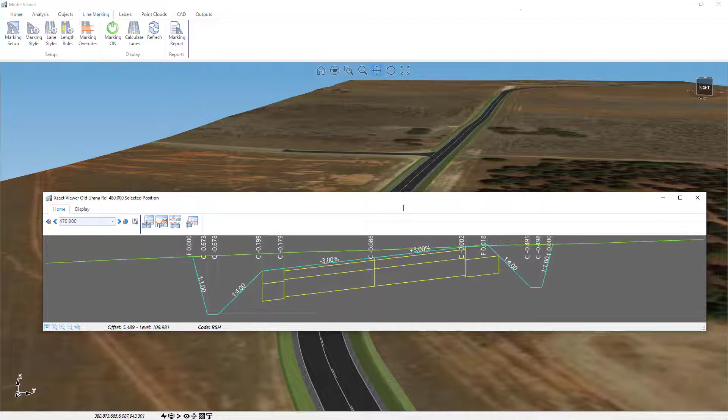And if we wanted to review the super elevation or make some changes to it, we go back to the Roads tab, expand out road string, and then down the bottom you'll see super elevation. So I'll just select the road we want to view. So you can see what Project Assist has added in here to create the super elevation. The results get shown in this table, which is fully editable. So if you want to change the crossfall or the widening for any curve or recalculate at a different design speed, this is where you go and do that.

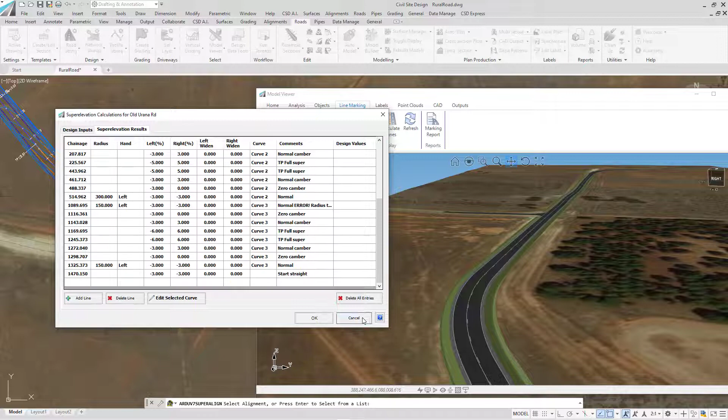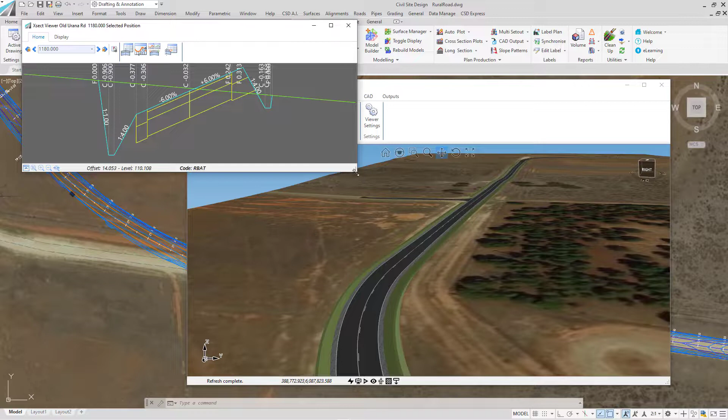The final thing that the plugin has done for us is calculate the table drains. So if I go into the design data form, you'll see that there's this table drain entry. And the way this table drain works is if we are in cut, then the table drain will be put in. But if our road was in fill, then we'll just batter to the surface. So the table drain has a level of intelligence there.

So that's a quick look at the new Rural Road Design plugin for Project Assist, and we'll aim to create a lot more plugins for Project Assist to help you out with certain tasks. The idea here is the plugin becomes a time saver where you don't have to fill out all this information, create all these tables, etc. The plugin will do all that for you and get you up and running.

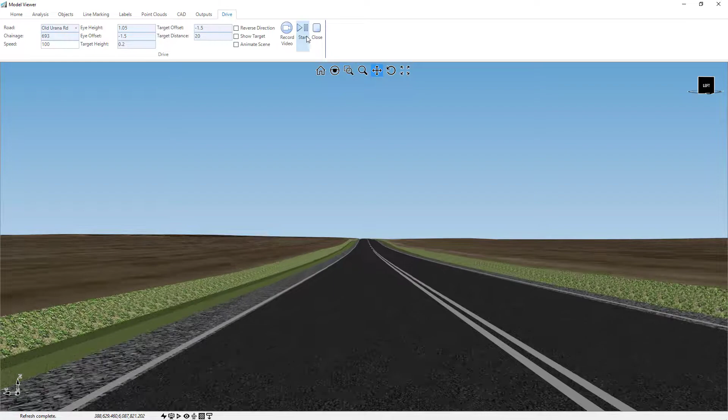Fantastic. Yeah, there was actually a question, Andrew, which you might be able to answer now, which is Marco asking, once you've taught the AI, can the AI be transferred to another computer? Yes, there are some files that are stored.

I guess we could open it up now, Jonathan, if you wanted to, but yeah, happy to. Yeah, might as well show everyone where it can be accessed. So in your common folder, there's a folder called Job Prepper. Yeah, so this is my common 10, everyone. Yep. So if you just copy that folder, all of that stuff, and brought it onto the other computer, then it's got a lot of the learning data and the AI model that gets used.

Yep, fantastic. So guys, as you begin to build your personal set of projects with the AI, obviously someone else will have their own personal one, but as Andrew said, with the councils, if you've got a standard naming convention for your alignments, etc., then the idea would be that you could almost have someone run this for a bit, set up the convention and then share that with the team as new people start. They can go in and access the same setup as everyone else as a base, which is handy. Thanks, Andrew.